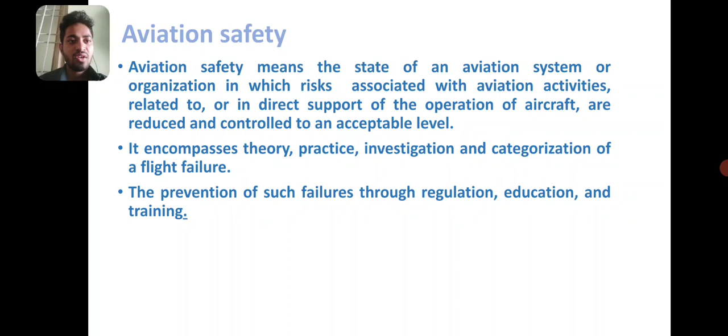In this presentation, I am going to discuss a concept area of flight mechanics, that is aircraft operation safety, aviation safety. Aviation safety means the state of an aviation system or organization in which risks associated with aviation activities related to or in direct support of the operation of aircraft are reduced and controlled to an acceptable level. It encompasses theory, practice, investigation, and categorization of flight failure, and the prevention of such failure through regulations, education, and training.

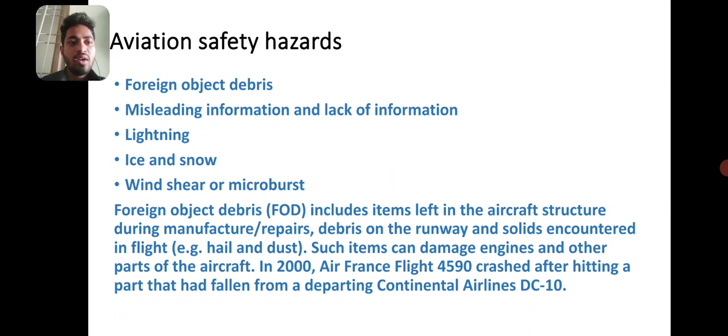Aviation safety hazards: foreign object debris, misleading information and lack of information, lightning, ice and snow, wind shear, or microburst. Foreign object debris (FOD) includes items left in the aircraft structure during manufacture and repairs, debris on the runway, and solids encountered in flight, for example hail and dust. Such items can damage engines and other parts of the aircraft. In 2000, Air France Flight 4590 crashed after hitting a part that had fallen from a departing Continental Airlines DC-10.

Misleading information and lack of information. A pilot misinformed by a printed document, manual, or map, etc., reacting to a faulty instrument or indicator in the cockpit or on the ground, or following inaccurate instructions or information from flight or ground control, can lose situation awareness or make errors, and accidents or near misses may result. The crash of Air New Zealand Flight 901 was a result of receiving and interpreting incorrect coordinates, which caused the pilots to inadvertently fly into a mountain.

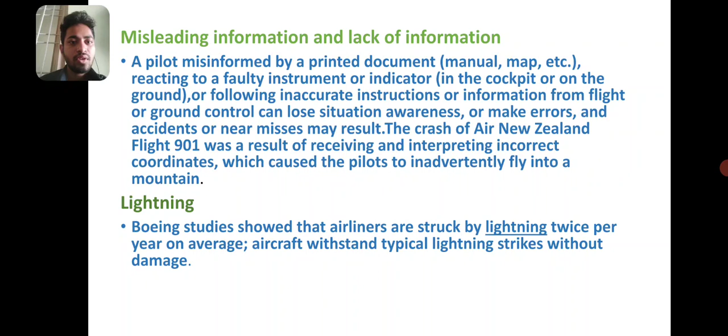Lightning. Boeing studies showed that airliners are struck by lightning twice per year on average. Aircraft withstand typical lightning strikes without damage. Ice and snow. Ice and snow can be major factors in airline accidents. In 2005, Southwest Airlines Flight 1248 slid off the end of a runway after landing in heavy snow conditions, killing one child on the ground. Even a small amount of icing or coarse frost can greatly impair the ability of a wing to develop adequate lift, which is why regulations prohibit ice, snow, or even frost on the wings or tail prior to takeoff. Air Florida Flight 90 crashed on takeoff in 1982 as a result of ice and snow on its wing.

Engine failure. An engine may fail to function because of fuel starvation, mechanical failure due to metal fatigue, mechanical failure due to improper maintenance, mechanical failure caused by an original manufacturing defect in the engine, and pilot error.

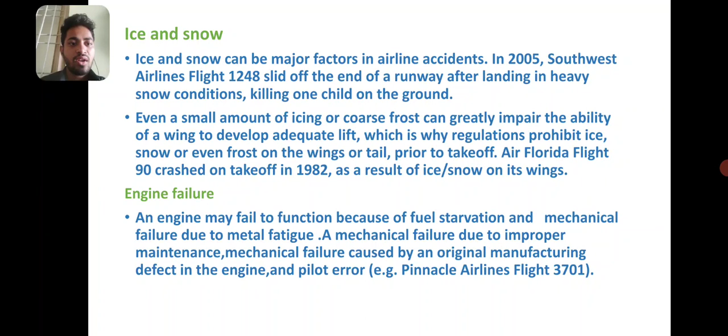Wind shear or microburst. A wind shear is a change in wind speed and/or direction over a relatively short distance in the atmosphere. A microburst is a localized column of sinking air that drops down in a thunderstorm. Both of these are potential weather threats that may cause an aviation accident. Strong outflow from thunderstorms causes rapid change in three-dimensional wind velocity just above ground level. Initially, this outflow causes a headwind that increases airspeed, which normally causes a pilot to reduce engine power if they are unaware of the wind shear.

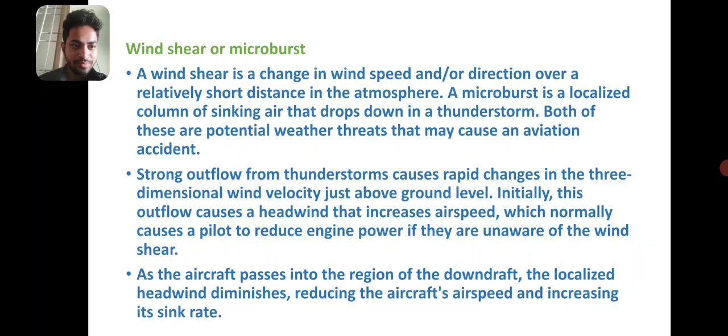As a result, as the aircraft passes into the region of the downdraft, the localized headwind diminishes, reducing the aircraft's airspeed and increasing its sink rate. Then, when the aircraft passes through the other side of the downdraft, the headwind becomes a tailwind, reducing lift generated by the wings and leaving the aircraft in a low power, low speed descent.

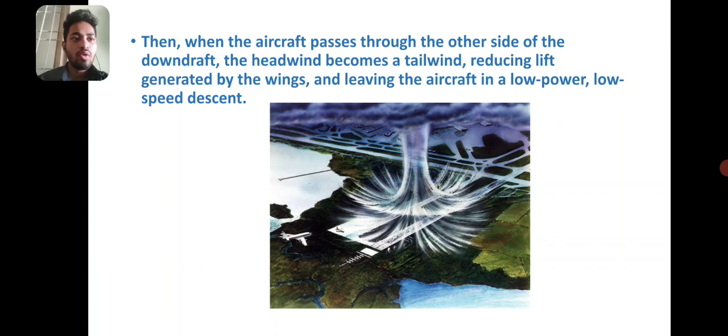Stalling. Stalling an aircraft increases the angle of attack to a point at which the wings fail to produce enough lift. It's dangerous and can result in a crash if the pilot fails to make a timely correction. Devices to warn the pilot when the aircraft speed is decreasing close to stall speed include stall warning horns, now standard on virtually all powered aircraft, stick shakers, and voice warnings. Stall basically occurs due to a sudden reduction in lift. Stall is dangerous in an aircraft because when a stall occurs, the airplane can fall down.

Before it happens, the pilot must know about the stall condition and he will instantaneously take decisions by changing the angle of attack or airspeed.

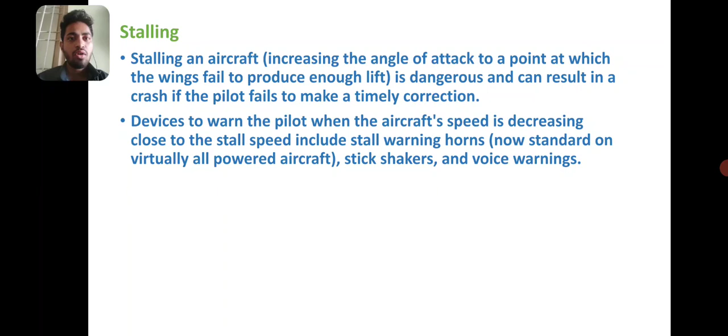Human factors. Human factors include pilot error or another potential set of factors, and are currently the factor most commonly found in aviation accidents. Much progress in applying human factors analysis to improving aviation safety was made around the time of World War II by such pioneers as Paul Fitts and Alphonse Chapanis.

However, there has been progress in safety throughout the history of aviation, such as the development of the pilot's checklist in 1937. Pilot fatigue, piloting while intoxicated, pilot suicide and murder, human factors of third parties, controlled flight into terrain.

Before the flight, the air hostess and other crew members show the safety precautions before takeoff. That really helps a lot. Even a small particle can damage the whole aircraft, or maybe in some cases it will crash.

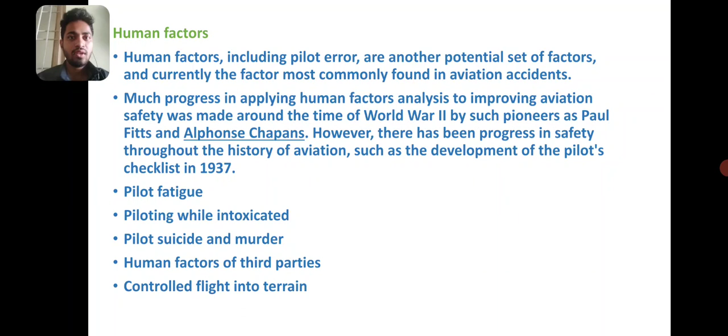Ground damage. Various ground support equipment operating in close proximity to the fuselage and wings to service the aircraft occasionally cause accidental damage in the form of scratches in the paint or small dents in the skin. However, because aircraft structures play such a critical role in the safe operation of a flight, all damage is inspected, measured, and possibly tested to ensure that any damage is within safe tolerance.

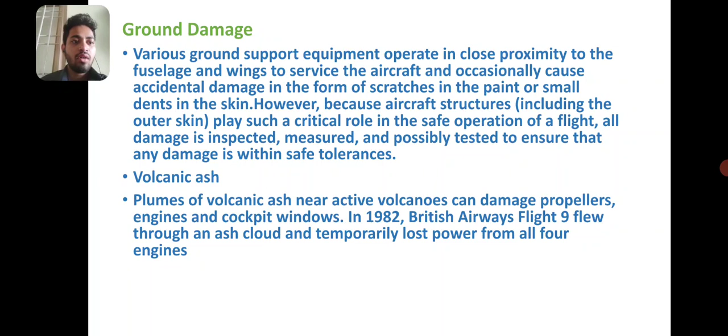Volcanic ash. Plumes of volcanic ash near active volcanoes can damage propellers, engines, and cockpit windows. In 1982, British Airways Flight 9 flew through an ash cloud and temporarily lost power from all four engines.

Runway safety. Types of runway safety include runway excursion, an incident involving only a single aircraft making an inappropriate exit from the runway. Runway overrun, a specific type of excursion where the aircraft does not stop before the end of the runway. Example: Air France Flight 358.

Runway incursion, incorrect presence of a vehicle, person, or another aircraft on the runway. Runway confusion, crew misidentifying the runway for landing or takeoff.

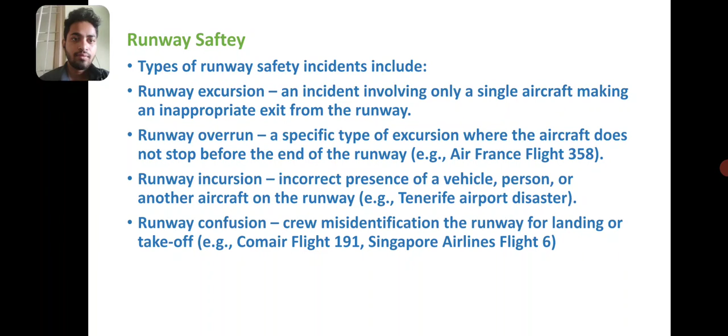Safety improvement initiatives. The safety improvement initiatives are aviation safety partnerships between regulators, manufacturers, operators, professional unions, research organizations, and international aviation organizations to further enhance safety. Some major safety initiatives worldwide are the Commercial Aviation Safety Team in the US. The Commercial Aviation Safety Team was founded in 1998 with a goal to reduce the commercial aviation fatality rate in the United States by 80% by 2007.

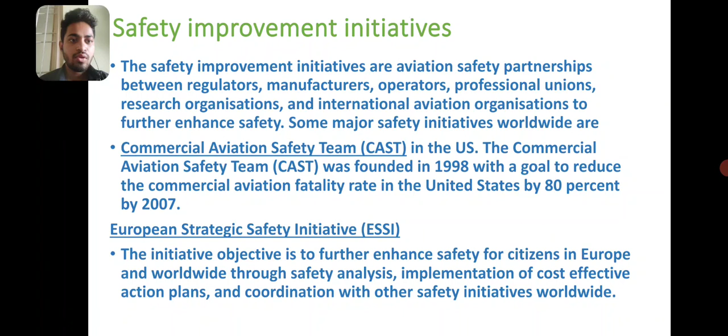European Strategic Safety Initiative. The initiative's objective is to further enhance safety for citizens in Europe and worldwide through safety analysis, implementation of cost effective action plans, and coordination with other safety initiatives worldwide.

After the disappearance of Malaysia Airlines Flight 370 in 2014, the International Air Transport Association said it was working on implementing new measures to track aircraft in flight in real time. A special panel was considering a range of options, including the production of equipment especially designed to ensure real-time tracking. Since pilot error accounts for between one-third and 60% of aviation accidents,

advances in automation and technology could replace some or all of the duties of the aircraft pilots. Automation since the 1980s has already eliminated the need for flight engineers. In complex situations with severely degraded systems, the problem solving and judgment capability of humans is challenging to achieve with automated systems.